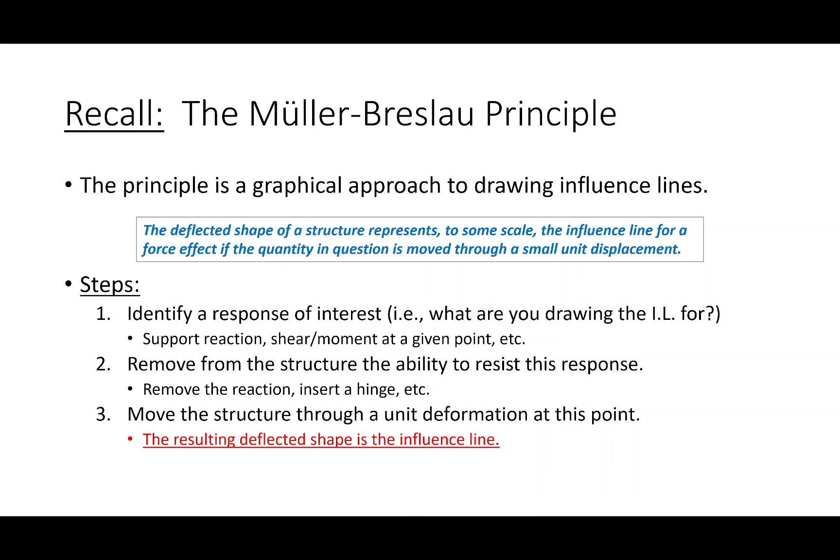Now, one of the things we have not discussed yet is a fixed support. I want to be clear that none of the rules we've derived so far are invalid for fixed supports. If anything, they are explicitly valid. But because of that, you need to be careful on what you're doing and why you're doing it. I want to make a point.

Let's say we are constructing an influence line for the vertical reaction at support A. So let's say I have a structure, and I want to find the influence line for this. Remind me how the Müller-Breslau principle works. I remove from the structure the ability to resist AY, and I move it through a unit displacement.

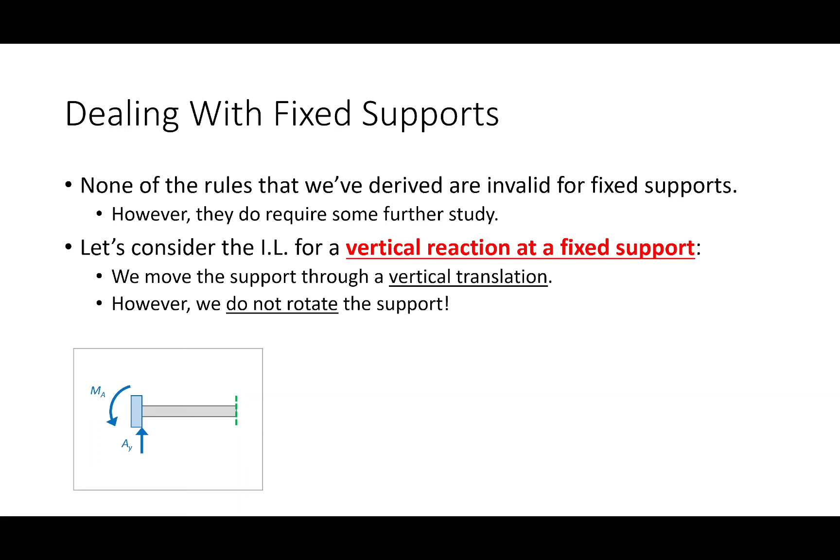Now, here's the thing. What we're going to do is move the support through a vertical translation. I didn't say anything about moving it through a rotation. So take a look at this. If you're constructing your influence line and you do this, that's wrong. Notice how what I'm doing is lifting the support, but lifting it like this.

That's wrong, because what's happening right here is you're not only translating it, but you're rotating it. I didn't say we're rotating it. We're moving the structure through a vertical translation. Because it's a fixed support, it doesn't rotate. So this is wrong, that's correct. We pick the whole structure up. Does that make sense?

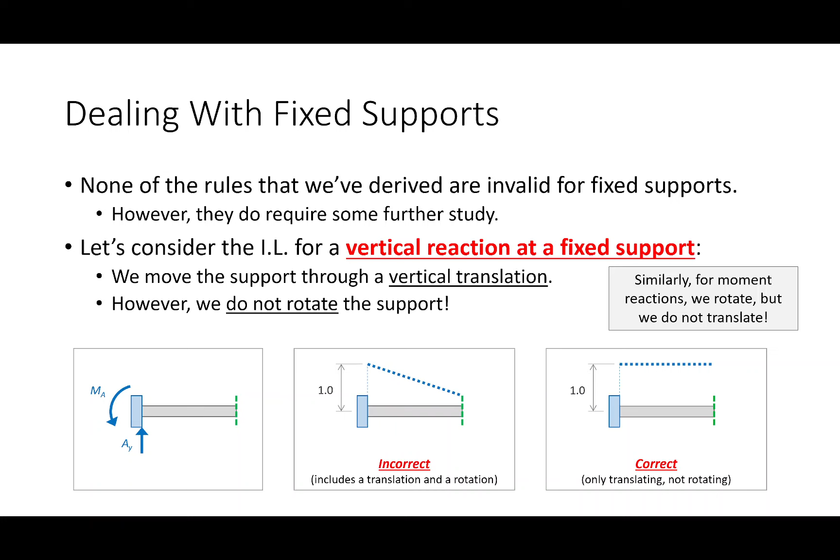I'm giving you the Müller-Breslau explanation as to why an influence line would look like that. I'm going to follow this up with a statics explanation as to why this doesn't work. By the way, this also works for moment reactions. For moment reactions, we would rotate, but we wouldn't translate. Moment reactions are a little easier, I think, to conceive of than vertical reactions, which is why I have a slide devoted to that.

So what we're going to do is a simple cantilevered beam example. We're going to draw the influence lines for this structure for the following responses: the reaction at A, both reactions at A I guess you should say, and then the internal response at B. By the way, this is a really simple example. I'm going to show you what happens if we take this beam and run wild with it, like what would happen if we had a really weird support scenario for a fixed-ended beam. Then you'll see it's actually not that bad, it's pretty easy to reason through.

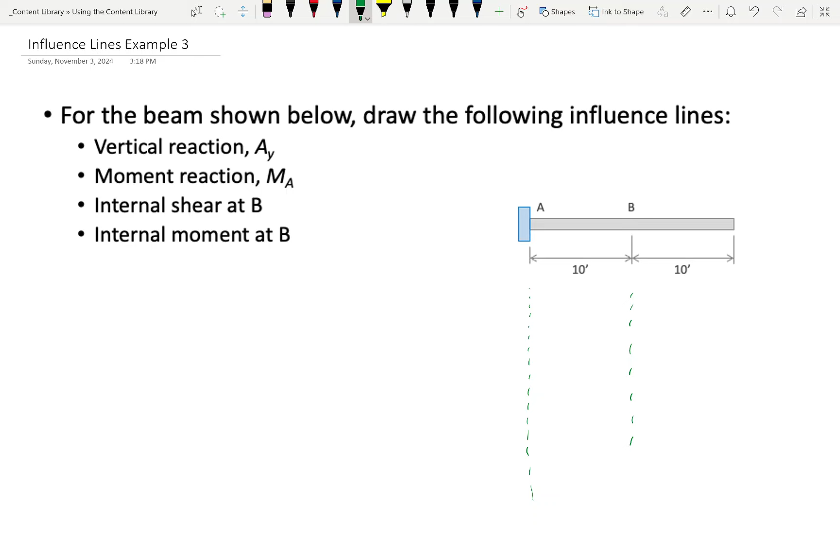So what we're going to do here is draw an influence line for two reactions. Let's draw the influence line for AY, and then let's draw the influence line for MA. I'm going to have something to say specifically about this MA influence line here in a bit, but just bear with me.

As I said, if we pick point A up and move it through a unit translation and rotation, that's wrong. So here's what we need to do. We're drawing the influence line for AY. Let's do the Müller-Breslau first. I'm going to take point A and move it through a vertical translation, but I'm not going to rotate it.

What does the beam look like after I've done that? If I pick point A up, pick it up one, but I don't rotate it, what would the beam look like after that displacement? Keep in mind, by the way, influence lines don't curve. So how do I pick point A up one without rotating it? What does the beam look like after?

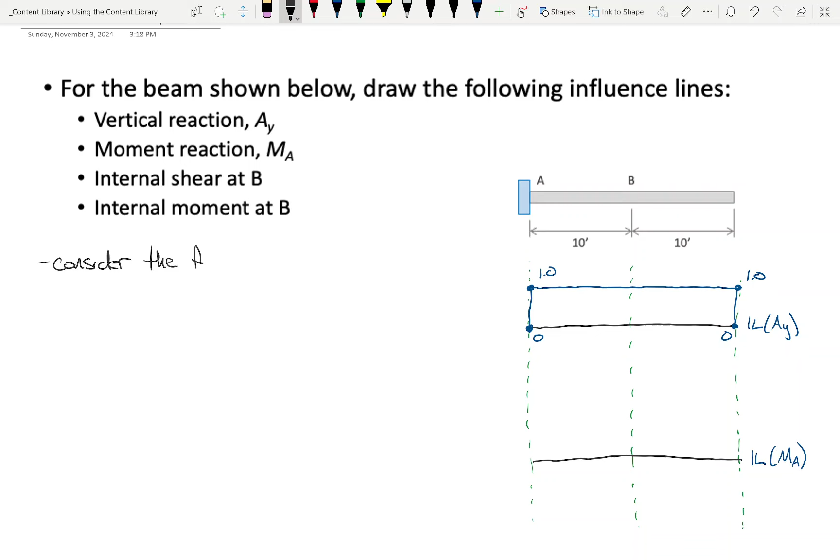Remind me, before we got to the Müller-Breslau principle, how did we construct influence lines? Ignore all this for a moment. What is the definition of an influence line? It's a diagram that tracks the response due to moving a one kip load across the entire structure, and then we record the response. Does that make sense?

Okay, so here's my point. Let's consider the following structure. Here's the structure, and I have AY, MA, okay? And the beam is 20 foot long. I want to place the load right there.

What is AY in this scenario? What is AY? 1. Does everybody see that? Sum of verticals, 1 down, 1 up.

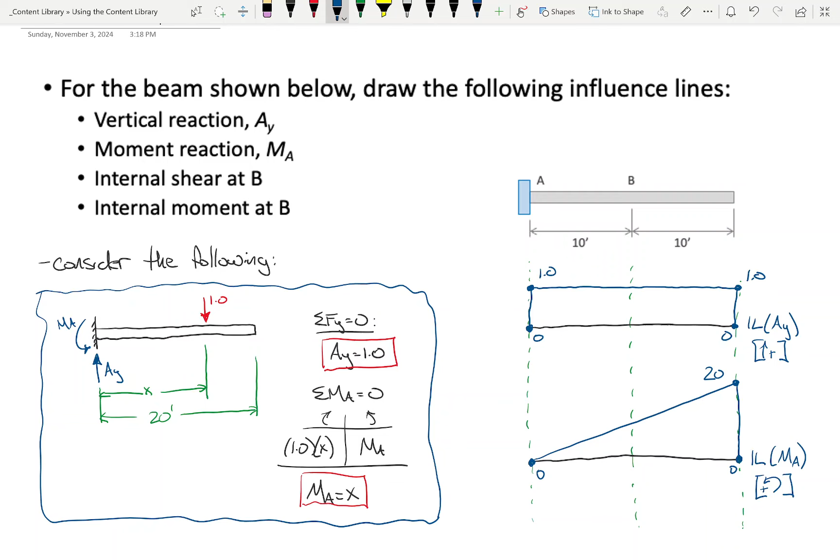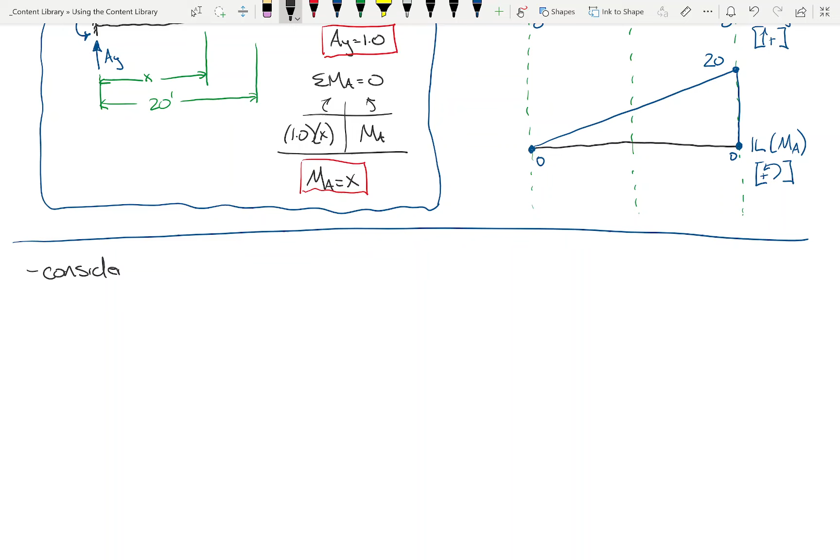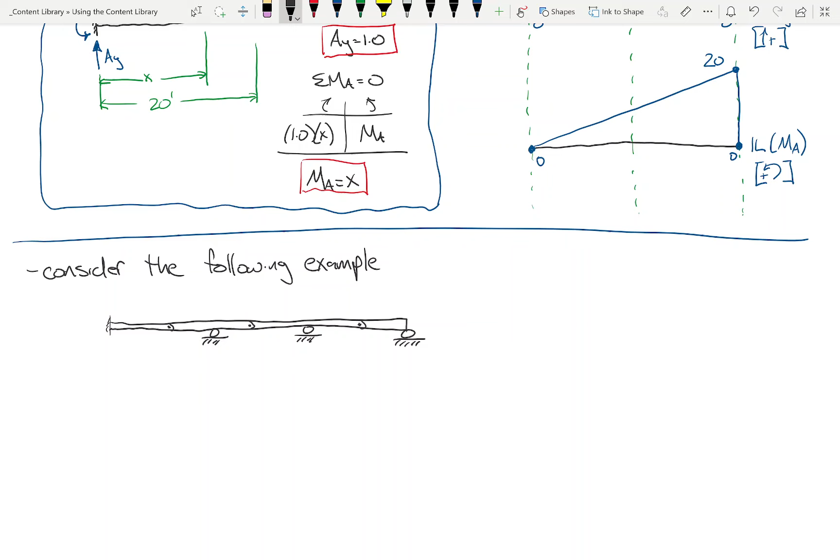Now, before we move on, let's consider the following example. I'm going to get a little wild with it. That's kind of nuts, isn't it? That's a weird structure. We're going to draw an influence line for AY. Just to put some simple dimensions on this, and my apologies that this is nowhere near to scale, let's just assume that these are all 15 feet.

By the way, what's the IE value for this structure going to be? Before you start counting stuff up, let me give you a different way of thinking about it. What is the IE for this structure? Is this determinate? Let's go back. IE is R minus EC plus 3, right? This has 1, 2, 3 reactions, no hinges. Everybody with me on that?

Now, what I did to this beam is I basically said, okay, I'm going to add a roller, but I'm also going to add a hinge. So is this structure determinate? Yes - add a hinge, add a roller, add a hinge, add a roller. So is this determinate? Yes, it is, right? So these are all going to be straight line segments on the influence line. Again, this one's kind of a crazy influence line, but I want you to see that this is very within our wheelhouse.

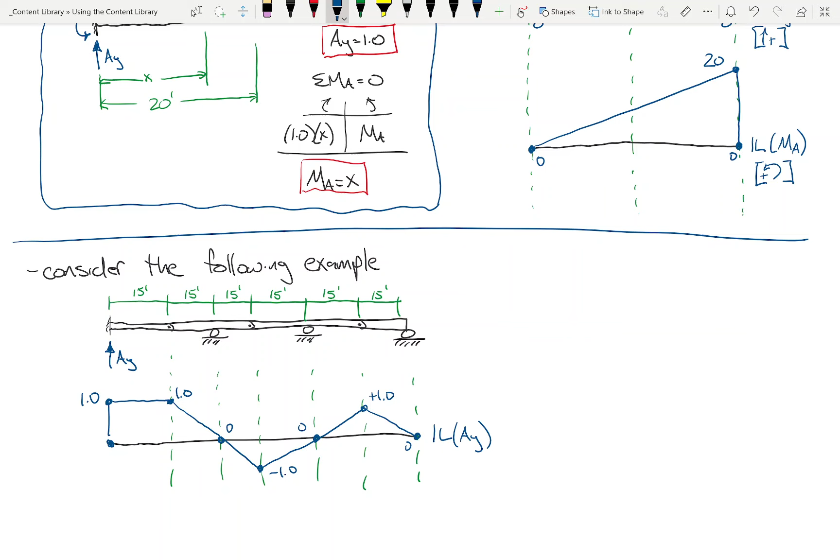We're moving point A through a unit translation, but it's not rotating. But the hinge serves to change the rotation, and the supports serve as the fulcrums on the seesaw. Everybody with me on that? I just wanted to do this problem on the side because I don't want any homework or exam problem to go, well, Dr. Mike did this really simple problem, but then he didn't do something that was really difficult.

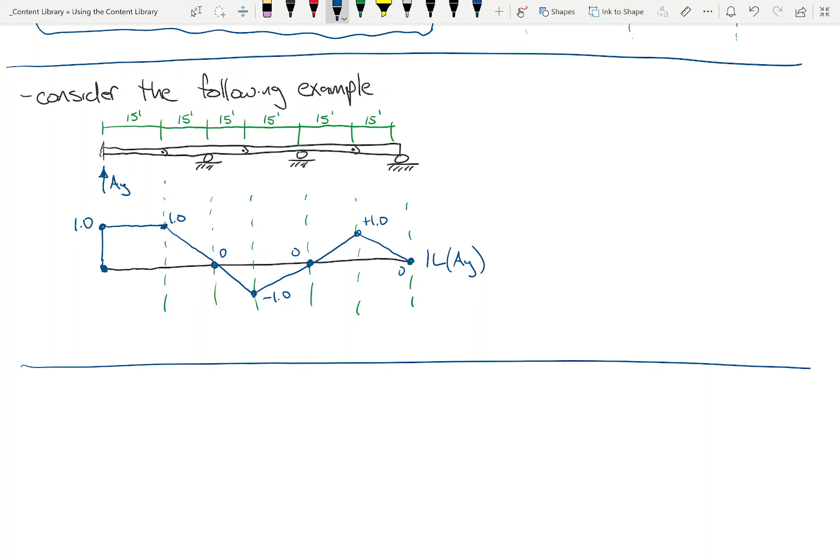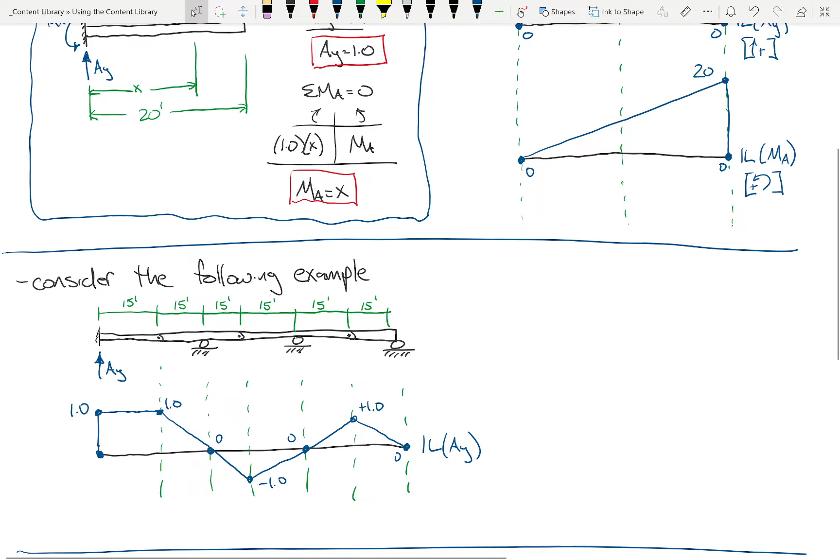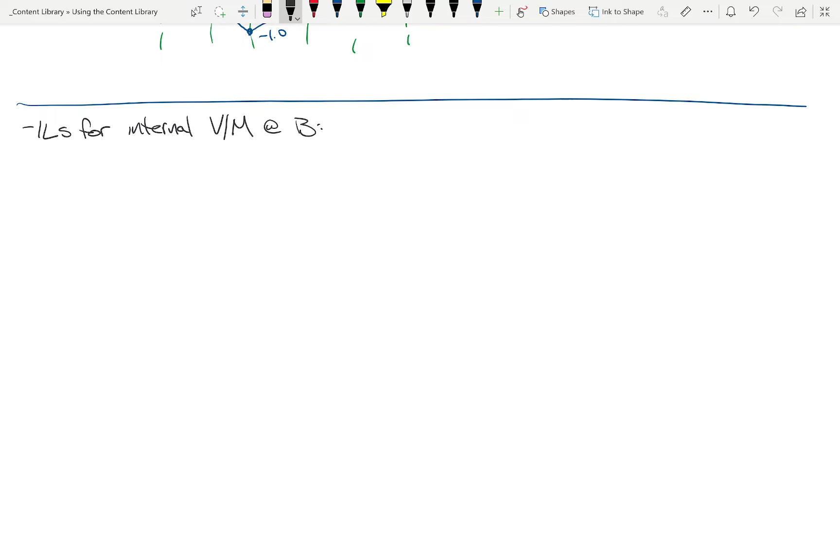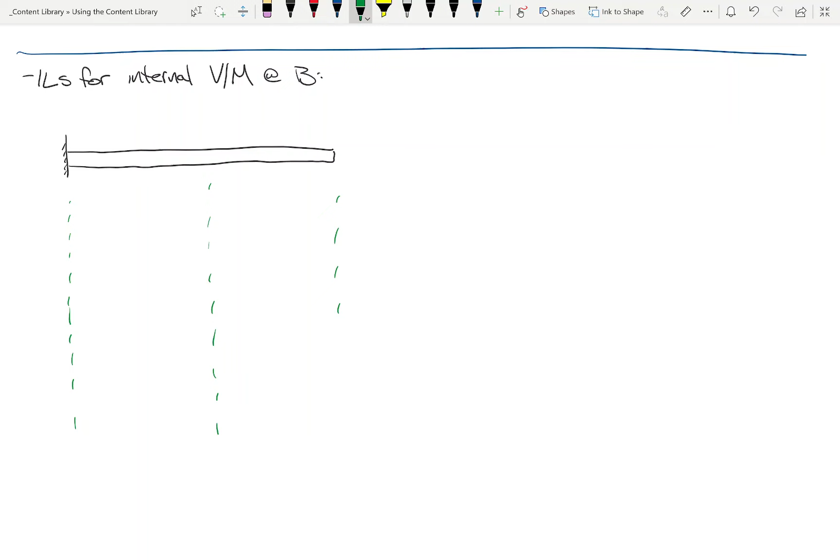Okay, let's get back to this problem, because I want to talk about the internal shear and moment at B. Okay. So here's the beam. And this is point B.

Now, before we start drawing these influence lines, I want to have a thought experiment with you all to see if this makes sense. Now, I know this isn't a fixed-ended beam, but just bear with me. Let us say that this is a diving board over the water. So how does a diving board work? You walk out here, you jump, boom, go down here. So if you were standing right here, that would be the worst case bending scenario you could think for the diving board. That's really going to make the diving board want to flex.

So let me ask you a question. Let's say you're standing right there. Does the diving board flex any? Well, it flexes, but not as much. Let me ask you all a question: let's say I'm standing right here, how much shear and moment is going on right there? Think it through. It sounds like a trick question, but I'm not trying to trick you. If you're standing there, think physically what's going to happen to the diving board - it's going to just go along for the ride, right? Is the diving board experiencing any flexure or any shear out there? Zero. Zero. Okay.

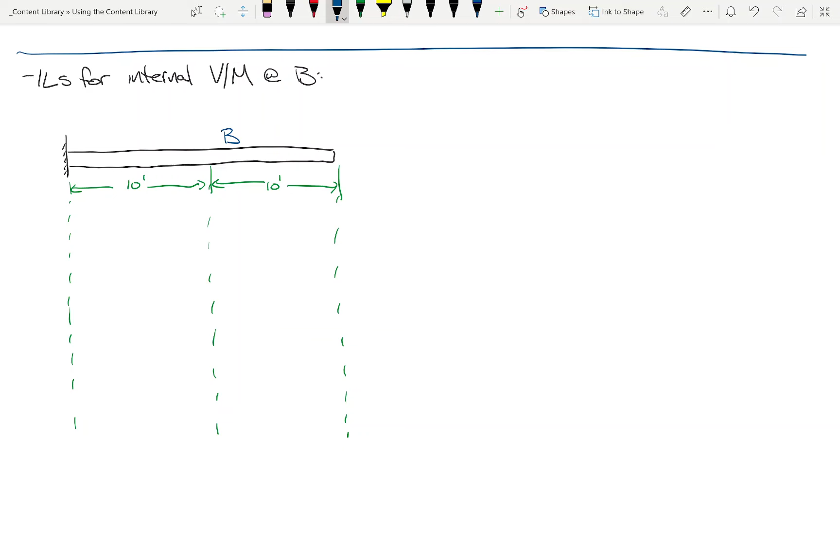So here's my point. Let's draw the influence line for shear at B and moment at B. Shouldn't it be 0 from here to here? I mean, why would point B experience any flexure if the load is back here? The load's back here, it's just going to go along for the ride. Does that make sense?

Now, I can already anticipate some confusing thoughts about the Müller-Breslau principle. So let's take the shear at B. So what am I going to do? Here's the beam, right? I'm going to install a shear release right here. And so some of you are going to tell me that this side has to go down, this side has to go up, and that's got to be what the shear influence line looks like. That's what y'all are going to tell me, right?

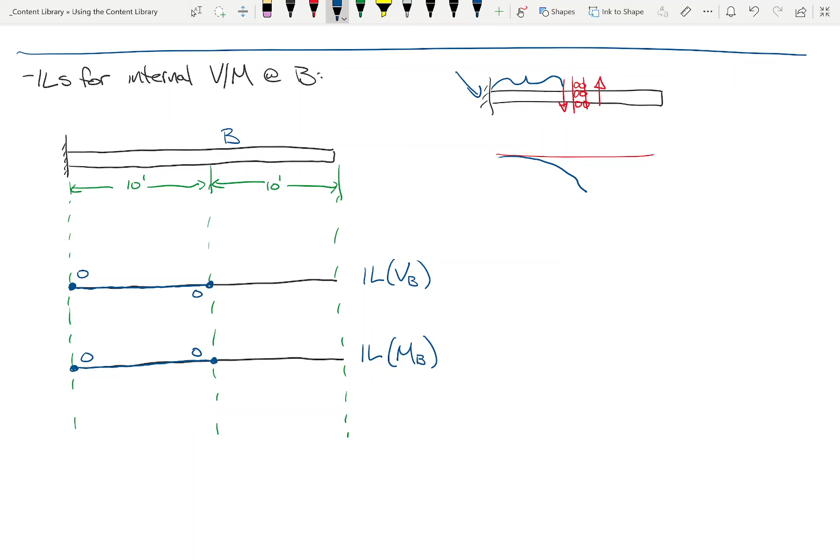So my question is, if this has got to remain flat because it can't bend, this side tends down, this side tends up, total displacement of 1, the only way I can do that is that. That is the influence line for the shear at B.

Okay, and if you're having a hard time visualizing that, let's think of another way of looking at it. What did you all tell me, that if you put a vertical load going down, this reaction is 1.0 regardless of where that is, right?

So let's cut a section at point B. If the load is on the left side of point B, what's going on inside the section? What happens if I look to the right? Do I see anything on the beam? Nothing. So anywhere the load is to the left of B, there's no shear.

But what happens if I take this load and just scooch it over here? What happens if I scooch it over there? Now, if I cut a section and look to the right, I have a sudden increase in shear, right? Once the load hops onto that other end of the section cut, I suddenly have a total jump in shear of 1. Does that make sense?

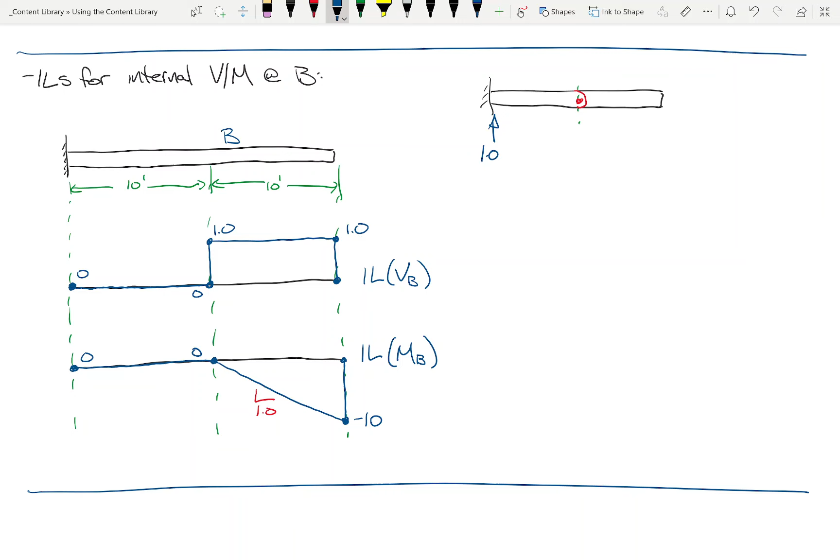Does that make sense? That, ladies and gentlemen, is the influence line for the shear and moment inside a cantilever beam. All right, does that make sense? Okay, can I show you trusses real quick before we call it? I'm not going to make you do a truss, by the way, but I do want to show you what's going on.

Everybody good? All right, let me show you a truss real quick. So what we've been talking about with influence lines for beams, for supports, and so on is that the Müller-Breslau principle will make our life a lot easier. Now, I want to be crystal clear from a theoretical standpoint: there's nothing to say you can't use the Müller-Breslau principle for trusses.

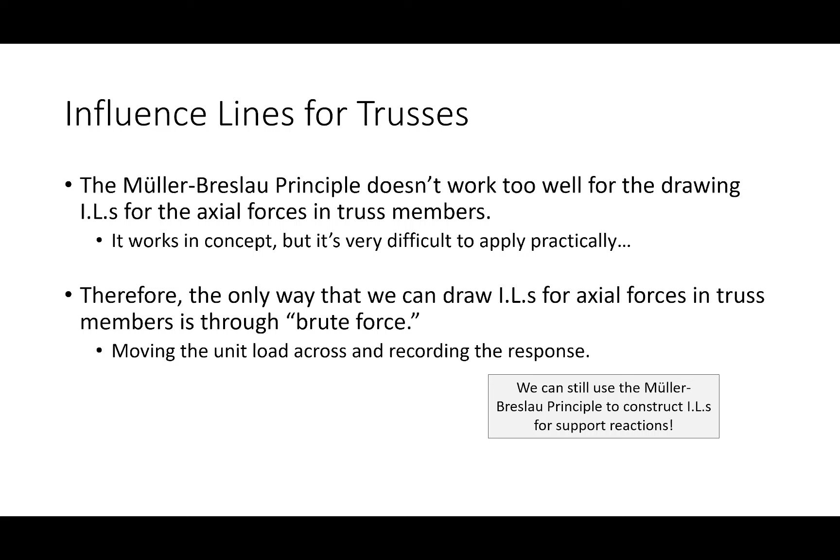It would just, in practical terms, be impossible to apply, because if you wanted to draw the influence line for the internal force in a given truss member, you would have to remove that truss member, put it through a unit displacement, and then figure out what the truss looks like afterwards. That would be impossible. So the only real way to effectively draw an influence line for a truss is by brute force: move the load, solve the truss. Move the load, solve the truss. It's kind of a pain, but you can do it.

Really the only thing I think is worth discussing with truss influence lines is, when you move the load across the structure, do you put it on the bottom joints or on the top joints? My answer to that would be, where's the road? I know that might seem like a facetious answer, but in all honesty, influence lines are meant to assess a moving load. So put the load where the load's going to be.

So for example, for this truss over here on the right, I would not hang the loads along the bottom of the truss. I would put it on the top because that's where the road is. Right? Does that make sense?

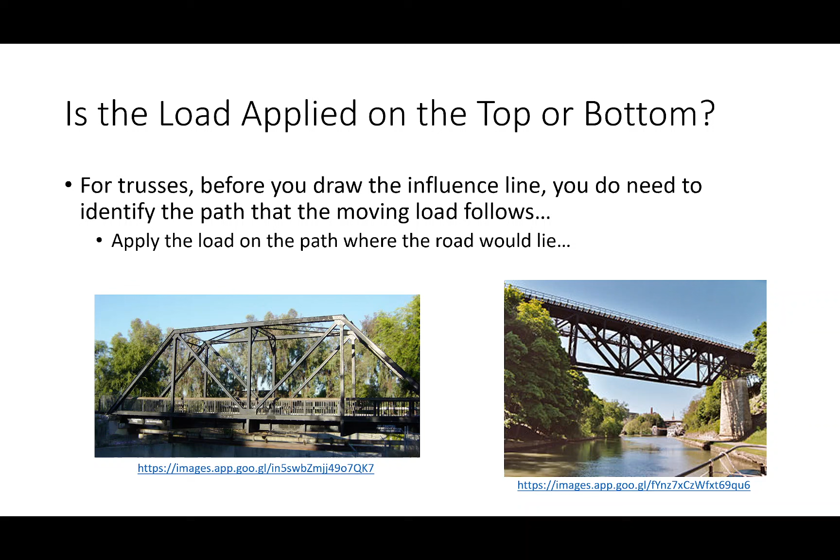Everybody okay with that? So just to show you how this would work, if I wanted to draw the influence lines for this truss, a couple things to keep in mind. We would have to solve the truss theoretically 5 times, because we would put the load here, here, here, here, and here. But there's a couple things that we can do.

First off, if I put the load at A or E, what is the internal response inside the structure? You had a good answer - that's going to affect B and D, just reverse. But I'm talking about if I put the load at A or E, what's the internal response inside the truss? It's 0, right? If I put a load at A, the truss isn't seeing anything. If I put the load at E, the truss isn't seeing anything.

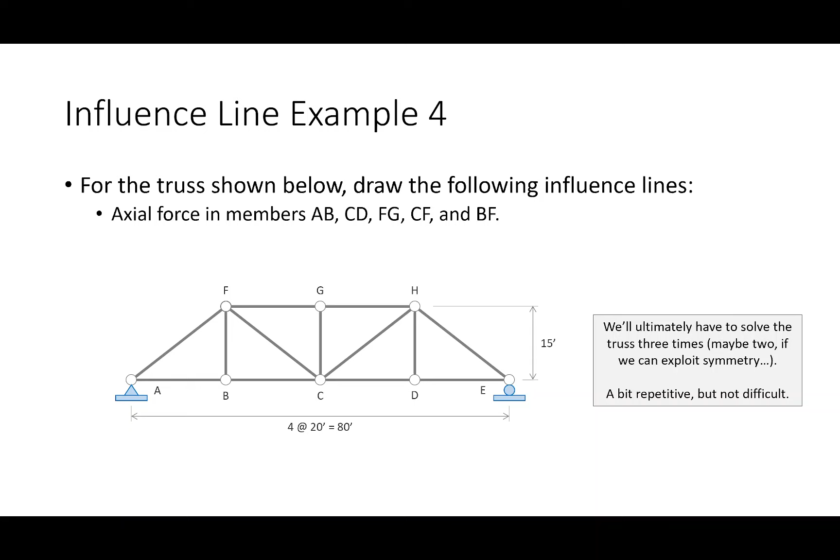So really, I only have to solve the truss 3 times, and if we're being honest, I only need to solve the truss twice. Because if I solve the truss due to the load at B, I could just mirror my results, and that's the answer for the load at D.

By the way, I can still use the influence lines for reactions. I can still do that. So like this is the influence line for AY, this is the influence line for EY. I can still do that. There's nothing to say I can't do that.

So let me show you what I did here. I put the load at point B, solved the truss, put the load at C, solved the truss. If I wanted to put the load at D and solve the truss, all I would do is just take this and flip it like that. And so I really have all my influence lines solved.

So if you want to draw a given influence line, what you would do is just pay attention to a given member. So like when the load's at A, let's take member AB. When the load's at A, this is 0. When the load's at B, this is 1. When the load's at C, this is 2/3. Does everybody see that? So when the load is at D, it's going to be 1/3 because it's going to be that mirrored response. And when the load is at E, it's 0.

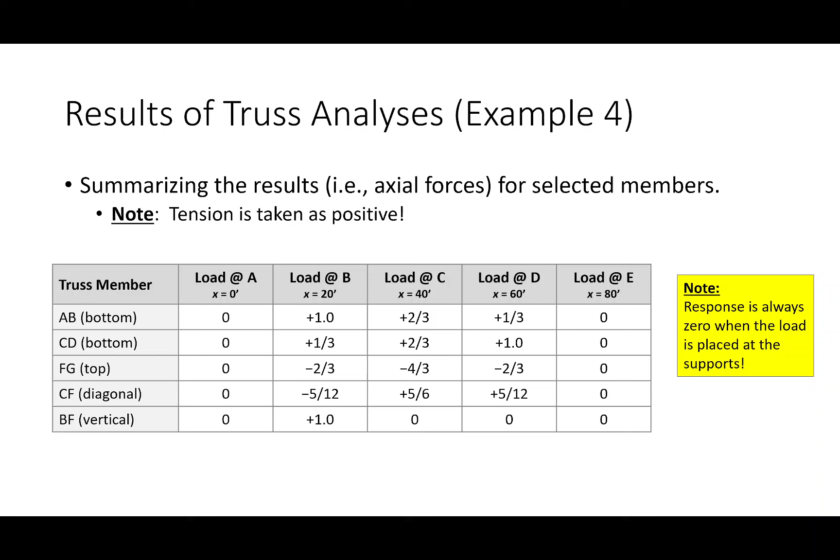So all you do is record all your responses, put it in a nice little table, and plot it out. And typically when you draw an influence line, you take your tensile results as positive, your compression results as negative, and here's what you get, okay? So here's some influence lines.

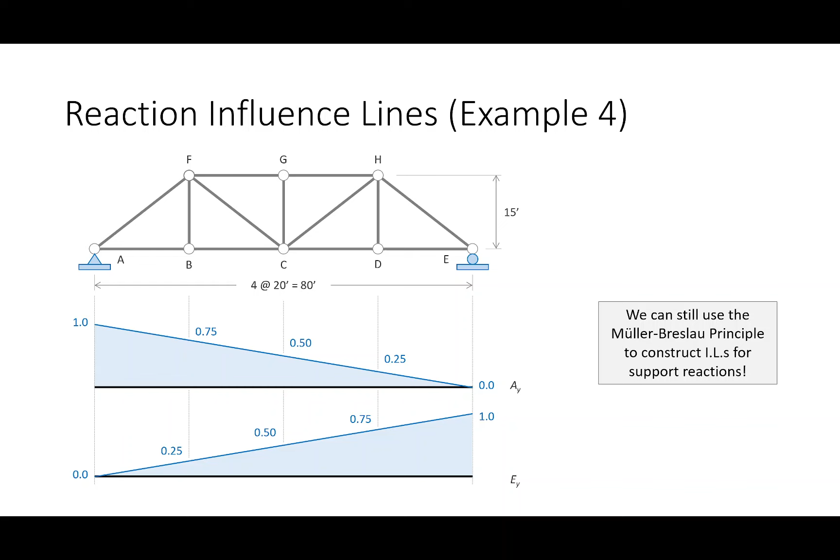Let's see if we can investigate some patterns, okay? So what about the influence line for member AB and member CD? That was this member and this member. Those are both in tension. Why are they totally, like, why are the influence line values all positive?

Because it's on the bottom of the truss. And so if you can think about this like a big old beam, the top side is experiencing compression, the bottom side is experiencing tension. That's basically what we've got going on. Remember, FG was on the top. So all of those are in compression, right?

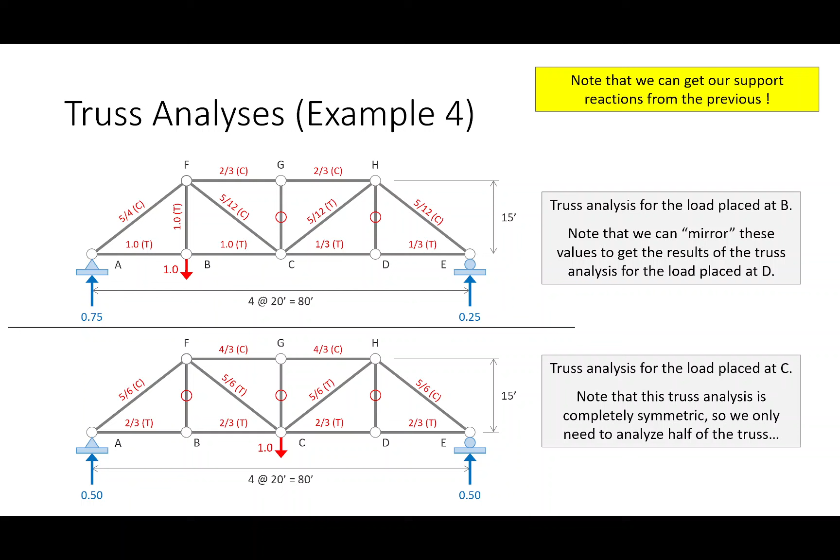What do we have going on here? Remember CF was an internal diagonal. So it sort of flips from tension to compression when the load moves over. And then member BF - that was a vertical member. So what happened on this truss is when the load was right here, it was 1, but when there wasn't a load here, this was a 0 force member. So the only time member BF experiences a load is when there's a load right at B.

Okay, does that make sense? Everybody, I mean, I know I kind of threw that at you, but it's really all you do is just brute force it and plot it. It's really not that hard.

So, sound good? Okay, I'm going to pull up the code one more time.